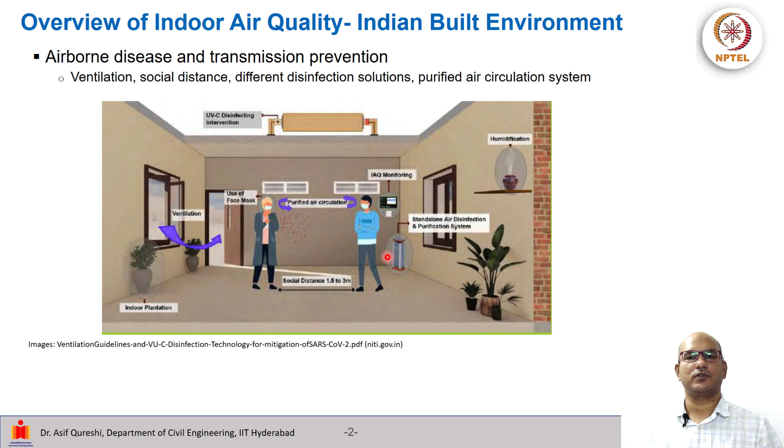So here we can have some disinfection mechanism in recirculated air. We can have purified air recirculation system as well. And of course, for prevention, one can use face mask also. In general, outdoor pollution can cause health hazards to inhabitants, generally due to the carryover of outdoor pollution inside due to ventilation or sometimes infiltration.

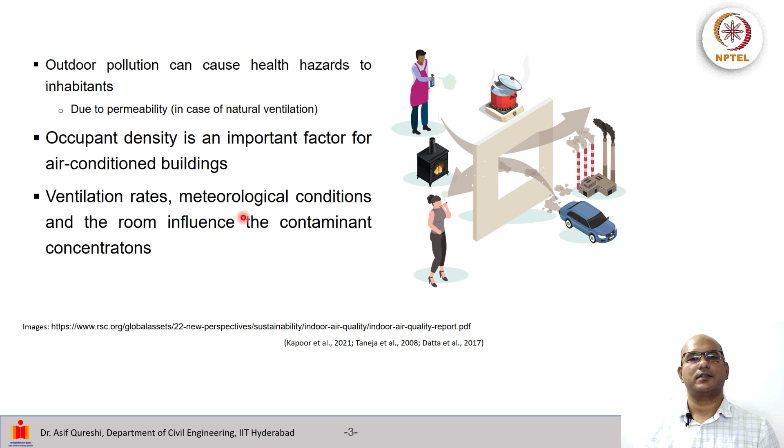So this is just a sketch where we have industry and we have vehicular traffic, and these pollutants are coming indoors. Then we have indoor activities such as cooking or spraying of aerosol which can contain VOCs. These are going outdoors. In air conditioned buildings, the occupant density is also an important factor, especially if the building is more airtight. Ventilation rates, meteorological conditions, and the design of the room can influence the contaminant concentrations.

Buildings can often have a high density of people and low ventilation rates, and the low ventilation rates could be due to space constraints. Also, high density of people can be due to space constraint, and sometimes due to inadequate or improper design. Sometimes the low ventilation happens because the windows and doors are positioned in a way that the noise is minimized,

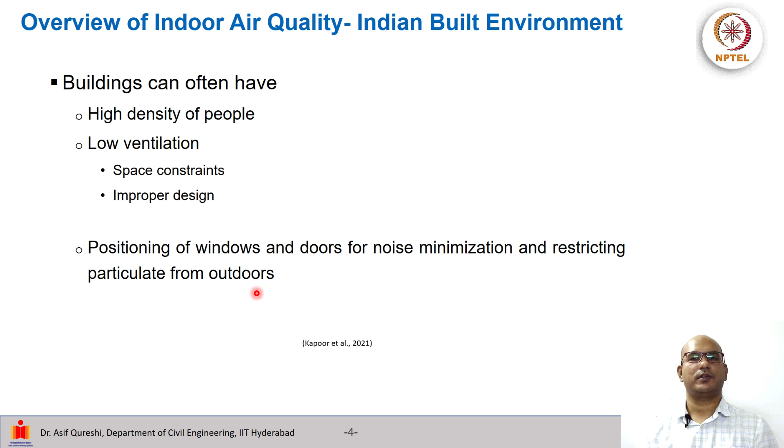and sometimes they are positioned in a way that if the outdoor is polluted, the transport does not happen from outdoor to indoor, which is okay if the outdoor is more polluted, but if the indoor environment itself has a cooking source or an indoor source, then poor ventilation leads to build-up of pollutants inside and a deterioration in the indoor air quality.

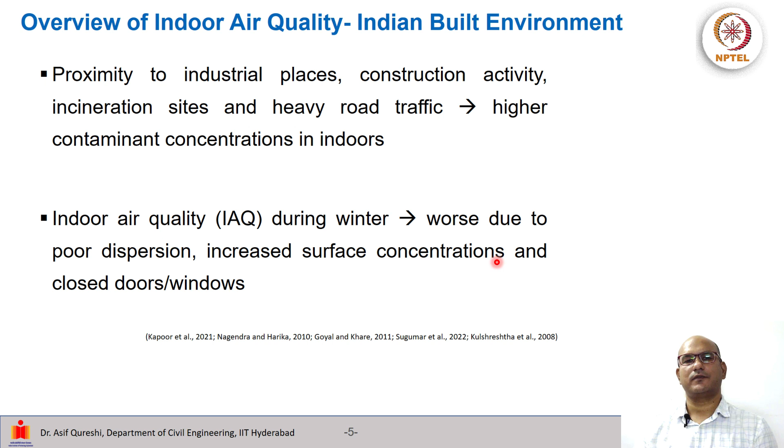Proximity to industrial places, construction activity, incineration sites, and heavy road traffic may generally lead to higher contaminant concentrations in the indoor air. The indoor air quality during winter can also become worse due to poor dispersion outside, and then this pollution comes inside and stays inside. Sometimes there may be more nucleation and growth of aerosols, and sometimes it is because the doors and windows are closed, so that the pollutant is built up indoors.

IAQ is further worsened when we have damaged walls or dirty floors, because then the pollutant may be resuspended. Old furniture, sometimes if they are dusty, dirty dusting material, shoe dust, chalk dust, and resuspension of old settled dust particles due to inhabitant activities. So here we are basically talking about more PM pollution, because all these things can possibly lead to emissions of one or other type of particulate matter.

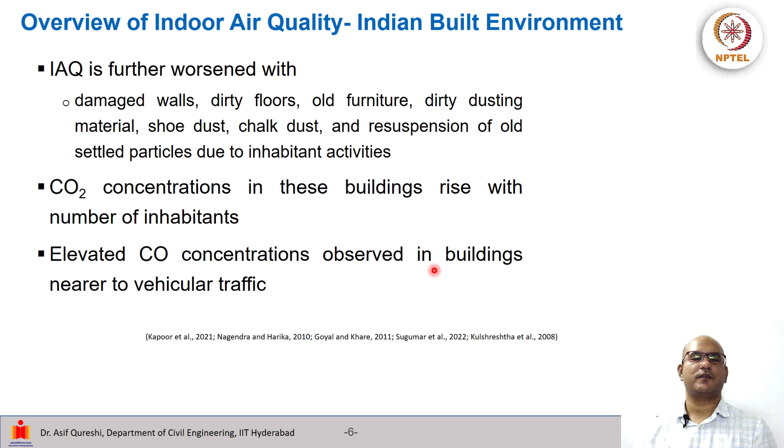CO2 concentrations in airtight buildings can generally rise with the number of inhabitants, and sometimes elevated CO concentrations have been observed in buildings nearer to vehicular traffic, in which case it is the outdoor air coming in.

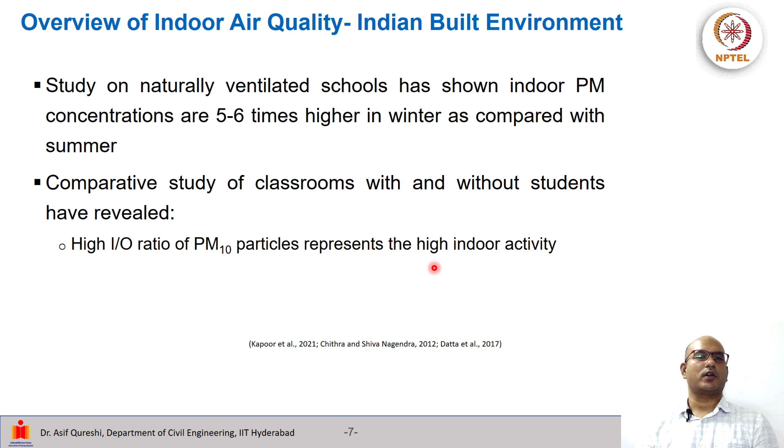Studies on naturally ventilated schools have shown that indoor PM concentrations are 5 to 6 times higher in winter compared to summer, and a comparative study of classrooms with and without students reveals that high indoor to outdoor ratios for PM10 particles have been observed, and generally they may represent high indoor activity, which means students moving around when they are in the classroom, or maybe a chalkboard is being used and the chalk is releasing some PM.

Various ailments such as asthma, coughing, dizziness, running nose, dry skin, eye irritation, shortness of breath, headaches have been reported in students inhabiting classrooms with higher PM. There are a lot of studies on PM, a few studies on CO or CO2, but very few studies on ozone, SO2 and NOx concentrations, and this is clearly a gap which must be addressed.

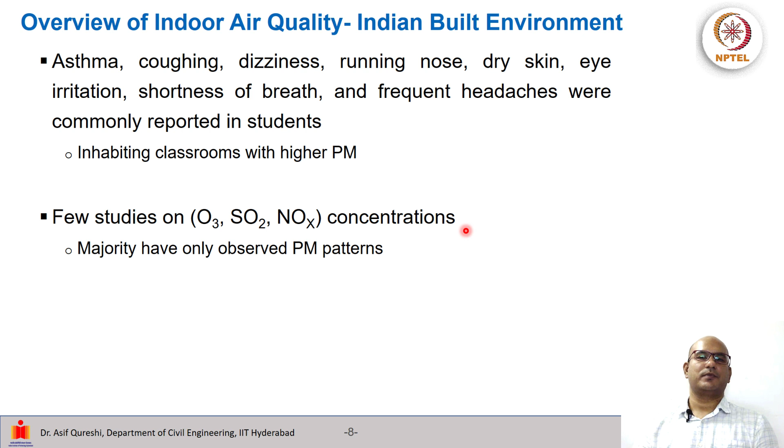Proper housekeeping, less crowded classes, paved areas and high greenery levels in the school may generally improve indoor air quality in the classroom. Proper provisioning of openings such as windows or doors and planned break times may also effectively dilute the trapped contaminants indoors.

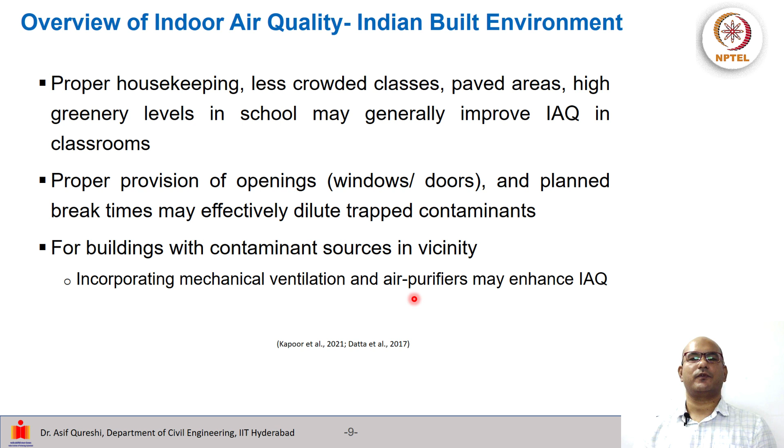For buildings that are in the vicinity of contaminant sources, one can incorporate mechanical ventilation and air purifiers, and this may help in enhancing the indoor air quality.

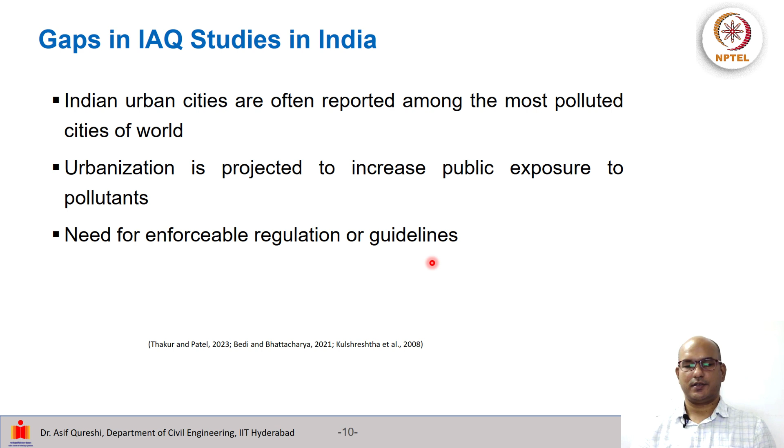There are several gaps related to IAQ studies around the world and also in India. In general, we know that several Indian urban cities are often reported to be among the most polluted ones. Also, urbanization is projected to increase, and this will increase the public exposure to pollutants. And if we have more airtight, less ventilated and highly dense buildings, indoor air pollution will become more and more prominent, and therefore there is a need for enforceable regulations, guidelines or standards.

Contribution of solid fuel is decreasing due to the shift to cleaner fuel alternatives, which is good, because that means indoor exposure to harmful contaminants emitted by burning of solid fuel will decrease. Still, lower income groups may suffer from solid fuels and associated emissions and exposure. The lower income groups also suffer from high population density, often their dwellings have poor or worse ventilation, and also there may be outdoor sources. So this group needs to be looked at, and the conditions in terms of exposure need to be made better.

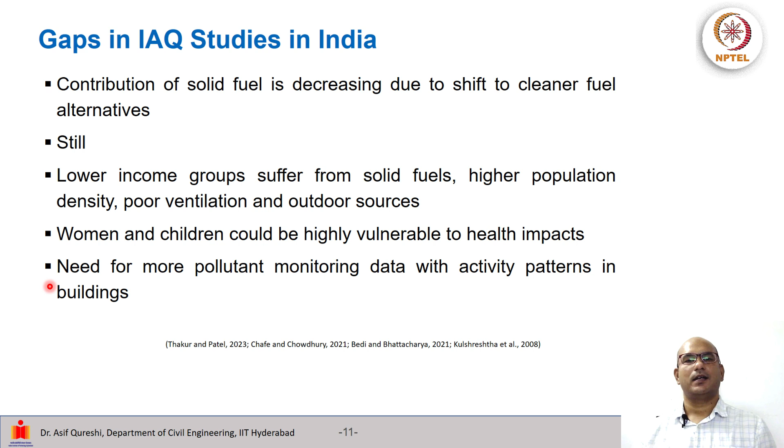Women and children could be highly vulnerable to the health impacts. And to address all this, maybe we also need more pollutant monitoring data with activity patterns in the buildings, especially in the lower income group settings, because these are the more vulnerable ones.

The IAQ can depend on humidity, ventilation rate, temperature, the presence of gaseous compounds, biological contaminants, and particulate matter, and a combination of factors, physical, chemical, biological, and those related to particulate matter, which can be any of the three. And the dynamic interaction can cause IAQ associated problems. Occupant exposure also depends on housing and behavioral factors, such as whether the person is moving around, or what kind of emissions are happening. All these aspects and their interrelationships need to be well established for different types of buildings and climatic zones.

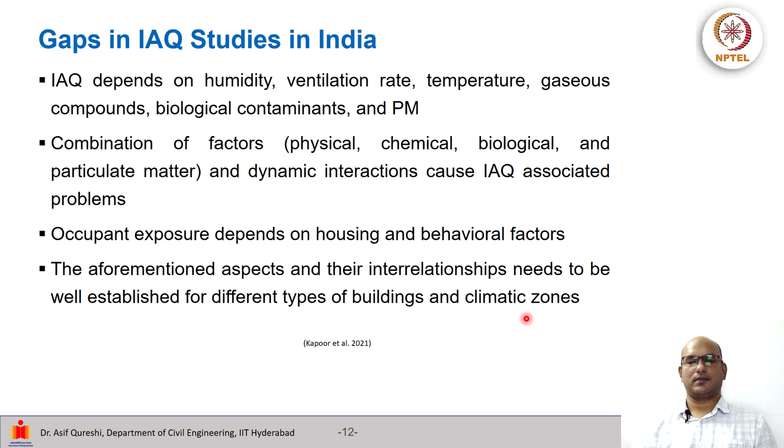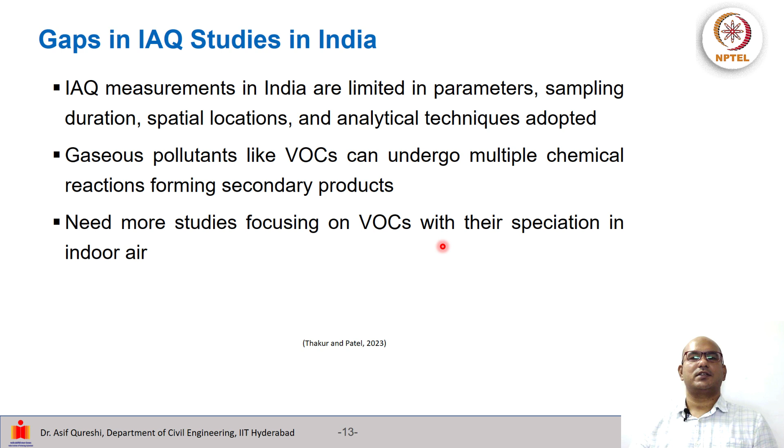Indoor air quality measurements in India are limited in parameters, sampling durations, spatial locations, the analytical techniques adopted, and the kind of analysis which is done. We already know that pollutants like VOCs can undergo multiple chemical reactions and form secondary products, which can also act as pollutants. Therefore, we need more studies focusing on VOCs and their speciation or reactions in the indoor air.

Higher outdoor levels and diverse indoor PM sources have restricted the PM measurements to PM1, PM2.5 and PM10 fractions generally. But fate and transport of particulate matter is a strong function of the PM size distribution. So we need to know how they change temporally. Temporal insights on the size distribution are critical for understanding the indoor aerosol dynamics, how these sizes of particulate matter are changing over time, in relation to the activity and the indoor conditions such as temperature or humidity.

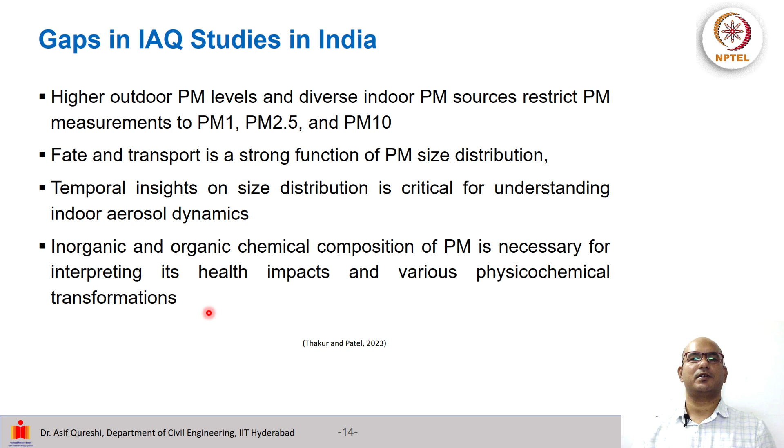Inorganic and organic chemical composition is also necessary for interpreting the health impacts and the physicochemical transformations of the particulate matter. Biological variables have often received very little attention, and therefore a better understanding of transmission of microbes due to ventilation and airflow patterns inside buildings is needed. In general, we need an inventory of various indoor pollutants, including biological materials, with baseline measurements, so that if we make an intervention, we can know what has been improved or not improved.

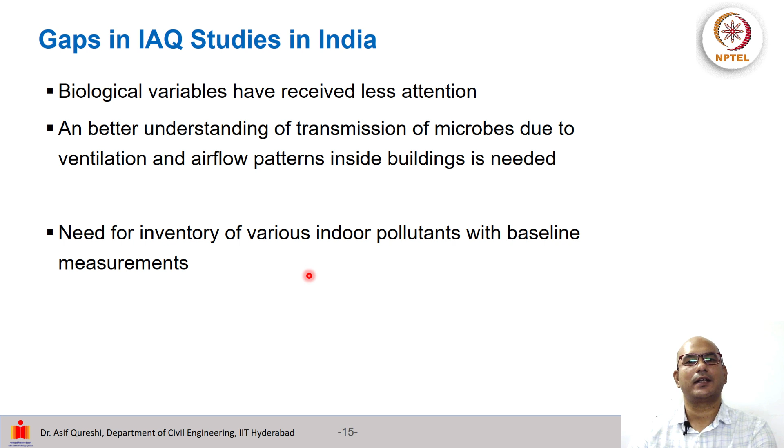We also need development of models which interlink the many projections needed for assessing vulnerability and suggesting measures for improvement in indoor air quality, such as future trends of urbanization, ambient air pollution levels, indoor pollutant concentrations, present and changing activity patterns of people, and the influence of technical or scientific interventions. Such modeling works could provide a holistic understanding of sources, transport, transformation, and the fate of pollutants in the indoor built environment.